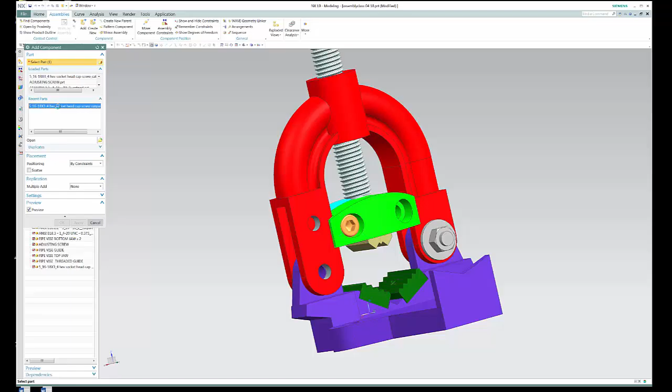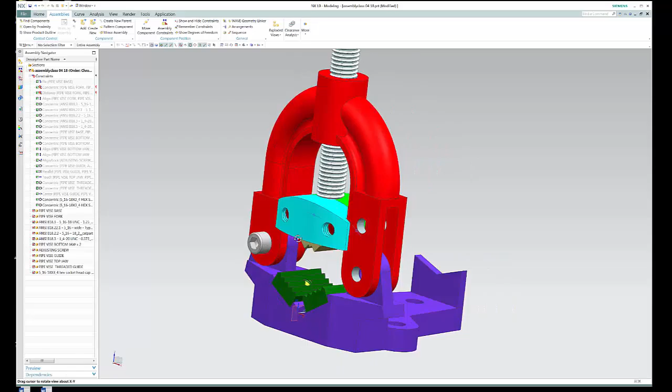Now I can go right here and pick that at this point, constraints, and we'll use concentric again. We'll pick this edge here, and again we can pick the outside part of that circle, flip it, say OK, and there you go. There's that part.

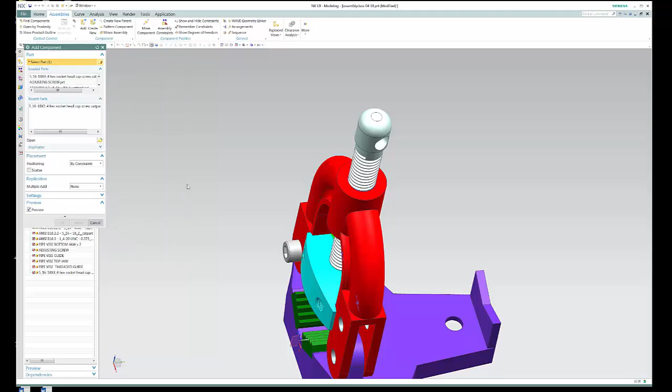Now let's go ahead and put that handle in on this particular piece. So we'll add in a component, and we'll go and find the handle. Now we don't need CATIA in this case. I believe we've got a part file for that, and that's the handle. There it is right there. Say OK, and we'll do the constraints again.

I want to make sure I can see everything I can. I can rotate this around here, and I can come in here and rotate this around if necessary. So we'll say OK. Now what I want to do, instead of concentric on this, I want to do an align lock, and I want to hover over this face right here, and notice the three little ellipses, the three little dots on the cursor. If I click that, it's going to give me options.

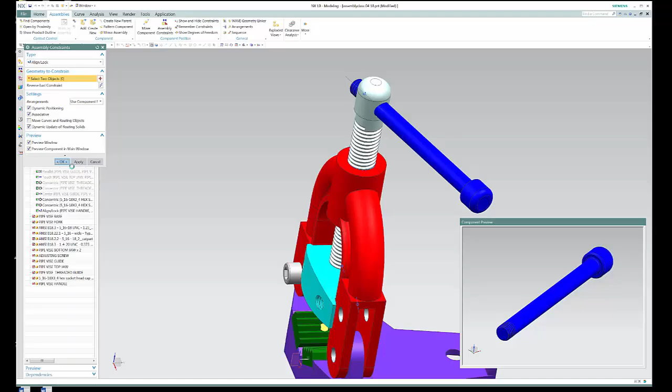Now, I don't want the face, I want the center line, and then I'm going to do the same thing over here on this model, and I'm going to click on that and get the center line of that, and I can say OK. Now that constrains that with that hole, okay, but it's not constrained along its axis, so I could still move that along the axis, which, whoops, sorry, that's not a problem.

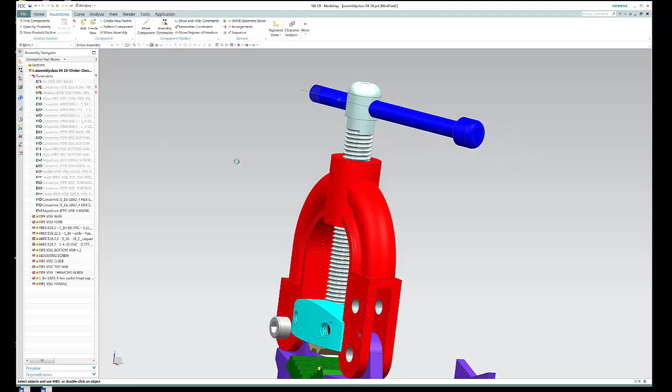I'm okay with that. Then what I want to do is go in and insert the other piece that mates up to that, and that's the handle end. And there it is. I'll hit OK. Let's rotate that around. Rotate this around maybe a little bit. Now that's going to be kind of a trick. Let's see. Let's go in there. Well, we'll say OK, and we'll do the constraints.

And let's do it at align lock again. And we'll hover over this piece, get the center line, and we'll hover any of those cylinders. It really doesn't matter. I want the center line of this piece, and I'm going to hit OK, and it is there. You can see it just barely sticking out there.

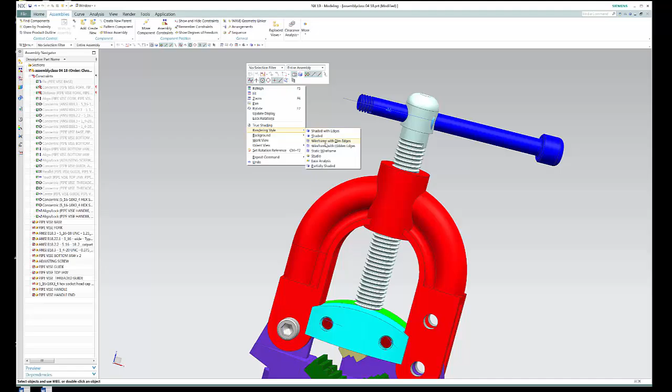Now if you have a problem seeing it, what you can do is right click and do a render style and do a static wireframe, and there you can see it. So it might be easier to move this one now without that static wireframe. You might be better off to just let it be shaded edges. And you can zoom in there and do a move component, grab that component, dynamic, and then grab that and move it out. And say OK. Alright, so there's that.

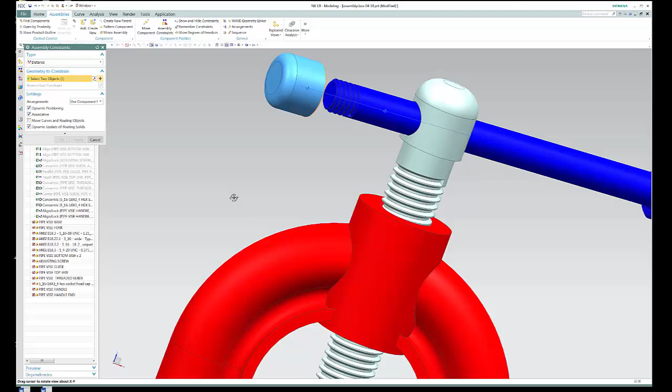Now I want to go in there and set up a distance. I want this piece to go in so far. Well, the threads are 0.3 long on this piece, so that's as far as we want that to go. So we'll do a distance, and we'll grab this face. We'll rotate this around and grab this face. And the distance on that now is going to be, it looks like minus 0.3 maybe. Okay, because we wanted to go negative.

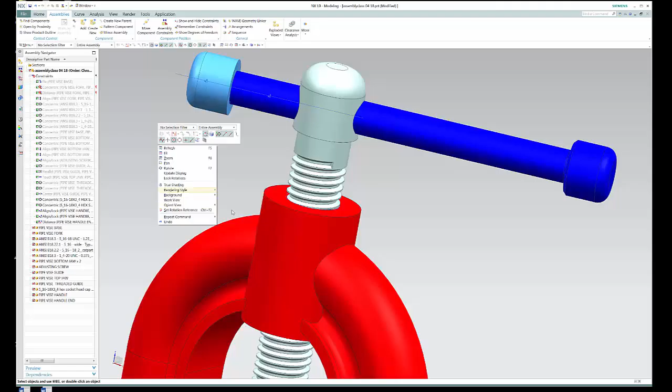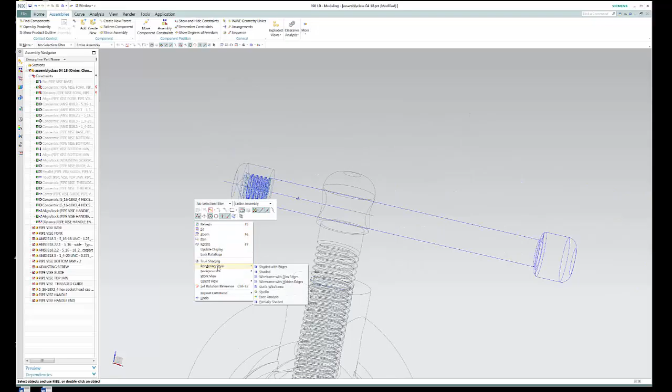And you can see then that that piece covers just like it should. Now, again, what you might do is do a rendering style and do static wireframe. And you can see that this handle doesn't go all the way into that threaded end, but they do line up pretty well with the edge of the thread. So that's what we would probably want on that. So we'll go back in and do a shaded with edges. I like the edges better. And that takes care of that.

So just a couple of little tricks along the way. I'm just going to hide those constraints. Hopefully that'll help you out a little bit. So I just wanted to give you another little heads up there.